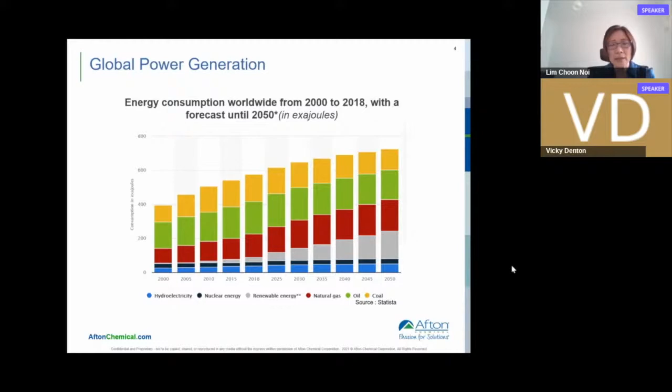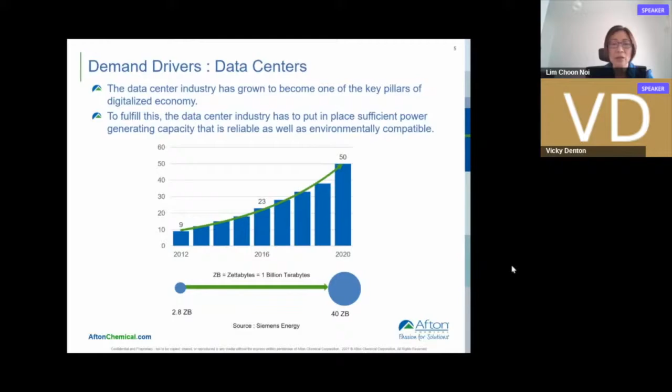So another area where we can see energy consumption increasing is the data platform, right? The current webinar that we are on, the data centers supporting all these webinar platforms are all needing the power to move ahead. So you can see that there's an exponential growth in the demand for data centers, and all this growth comes primarily from the use of internet platforms.

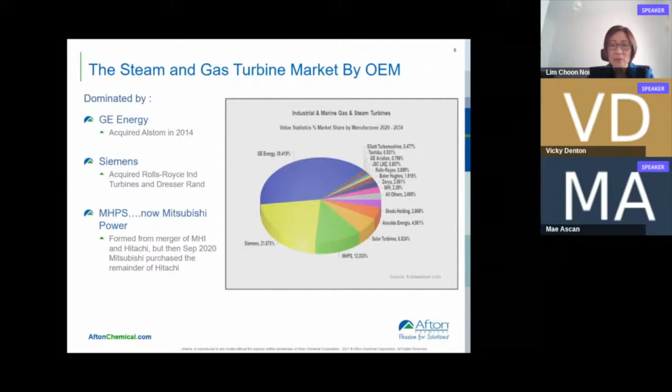So being the dominant supplier of such OEMs, it's obvious that they are taking a very strong leading role in making their turbines more efficient, more sustainable, more durable, as well as more long-lasting. And in doing so, they need to be supported by, of course, software, and all the other peripherals, including the oil that lubricates the equipment. And this is where turbine oil comes in as a very strong factor to support this sustainable growth.

Okay, how many types of turbines are there? Primarily, they are divided into 3 for the discussion this afternoon: water, steam, and gas. And you can see that there is a big difference in each of these, and the gas on the right column is actually having the highest speed. And the speed is important in this case, where it generates the power. Okay, so speed comes along with temperature in the oil, and of course the hot spot peaks.

So contrastingly, you can see that on the gas turbine, all the parameters that are listed are on the upper end as compared to the other 2 turbines. And so the severity of operation in a gas turbine is definitely a lot more in terms of demand, and therefore the demand of the lubrication process is also higher. That also explains why in the gas turbine, the service life is usually shorter compared to the other two turbines.

And that is a very strong factor when we have a combined system, meaning a steam and a gas system operating together. And obviously, with gas having a higher demand in operating conditions, this will also drive the combined system into a higher requirement.

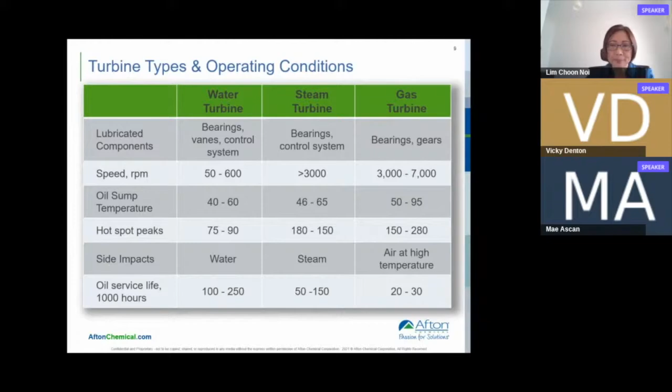Okay, so what are the requirements in the turbine oil, and how are they differentiated? Let me share with you here the OEMs that are playing a major role in providing turbine oil specifications. Turbine oil specifications defined by these OEMs are used for their own turbine. The turbine that they are making could be a steam, could be a gas, and they have this turbine oil specification that spells out what is required in each of these turbines.

On the right hand side, you have these industrial specifications, which are non-OEM defined, but are industrial standards from ASTM, the British standards, the German standards DIN, ISO, Japanese standard JIS, China GB standards, and US military. So these standards will define the type of oil that is required to operate in a certain type of turbine. There are other OEMs that do not define turbine oil, but they do also use these specifications, especially the industrial specifications, to guide the use of the turbine oil.

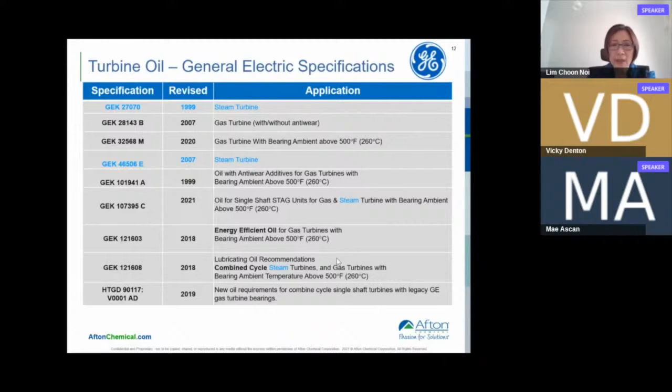Okay, so we'll go into a bit more detail on the turbine oil. In particular, you can see that the lubrication does not only include the turbine, it includes accessories linked to it, like the bearing and the gear. And therefore there are turbine oils that require EP, extreme pressure additives, since those need to be lubricated as well.

In the turbine oil specifications for OEMs, other OEMs like Siemens, MAN, Solar, Mitsubishi, and Ansaldo also have their own specifications as defined, and they are shown in the listing here. And one area is that they are sometimes divided into gas and steam, with different operating conditions.

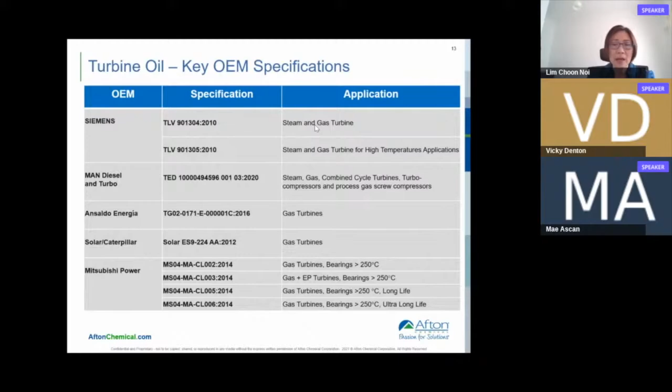For example, in the case of Siemens, they have two specifications: one covers the higher temperature and one covers the normal temperature. So in this case, a turbine oil that meets the higher temperature would naturally meet the requirement for the normal temperature, but not the other way. So it is important that when you select the turbine oil, it is suitable for the type of equipment as well as the condition of the equipment.

Okay, so on the next page, you can see that these turbine oil specifications are covered by industrial organizations. They are non-specific to any OEM, but some OEMs have adopted them as the basis and then added other requirements. Again, each of these specifications covers different conditions, whether it's normal standard temperature or higher temperature. For example, the DIN covers two temperatures, the standard and the high temperature application. And in the ISO, there's even a range that covers combined cycle turbines.

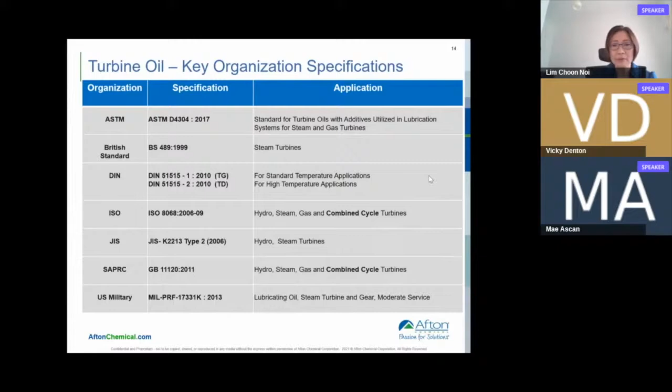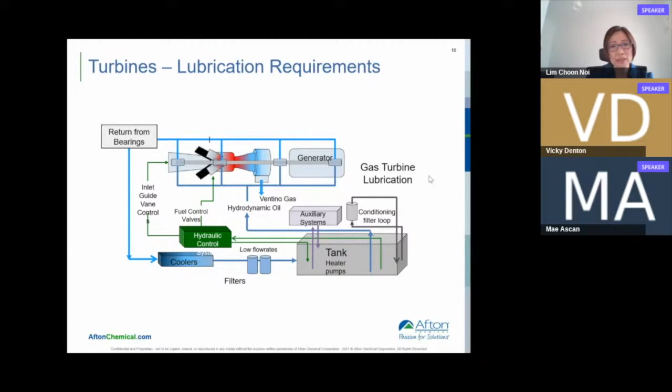So it's not just the OEMs that define the specifications for a turbine oil, it's also the industrial organizations. So what goes into a turbine oil to meet these requirements spelled out by either the OEM or the industrial specifications? You have seen from the requirements that turbine oil lubrication is about the equipment. It's about the whole system, not just the turbine alone.

Now, another characteristic of this turbine oil requirement would be what we call the surface characteristics, things like good air release property, good defoam property, as well as metal protection. Good air release is actually a property of the base oil, so it is important to choose a good, very stable base oil to work with. And when we talk about lubrication, foam and air do not lubricate well. So we need to select a fluid that has good demulsibility and good foam control.

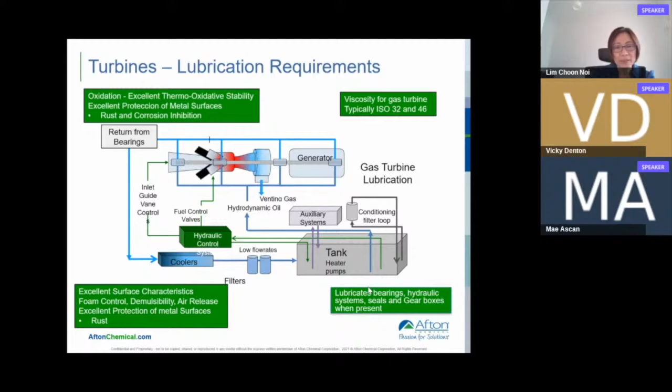So to sum up, the lubrication of the turbine oil also covers bearings, it looks at the gearbox, it looks at seal protection. So in looking at the turbine oil lubrication, we need to consider where these properties are embedded in the turbine oil.

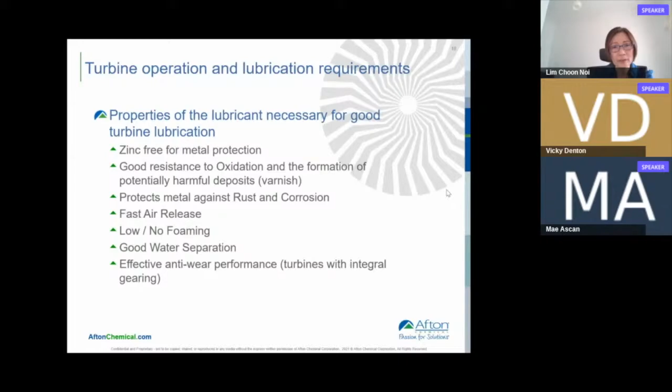Okay, so this is a summary of what I have just mentioned about turbine oil requirements: good oxidation, strong metal protection, whether it's steel, copper or bronze material, good air release and defoam properties, and a good selection of base oil that is compatible with the additives in the system.

Now, when we talk about turbine oil, the impact of the base oil cannot be ignored. We have base oils in Group 1, Group 2, Group 3, Group 4, and when we talk about mineral-based turbine oil, we typically look at Group 2 or Group 3 as suitable for a mineral-based turbine oil.

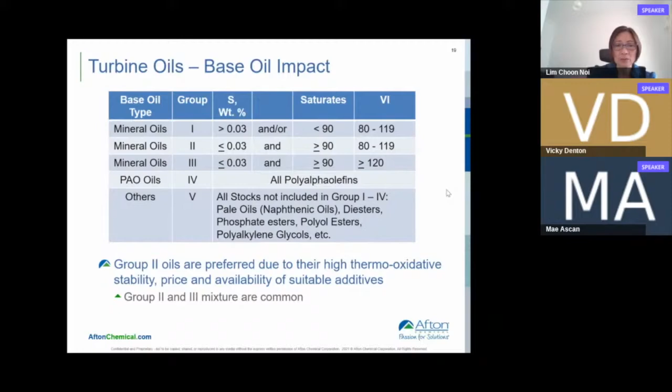Group 2 and Group 3 are the prevalent source and the preferred source of formulation with turbine oil, due to their nature of being very thermally stable and having good compatibility with additives formulation. So in the arena of turbine oil, preference is Group 2 or Group 3. And currently in market, Group 2 has very high accessibility, reachability, availability, pricing, economics. So it tends to be a prevalent source.

So this is an overview of why we choose Group 2 and Group 3. In a Group 2, we find that it's better in response to antioxidants, good synergies with antioxidants, and also good oxidation life measured by TOST. This is an oxidation test, and it also has a good air release requirement. So the preference of the base oil is also due to the base oil properties.

Another area, as an additive supplier, we find that the importance of selecting the correct or appropriate base oil is also to cover a very important area in oxidation specific to turbine oil, which is the varnish or deposit formation. This is a measurement of oxidation, the oxidized product, but quite specific to turbine oil.

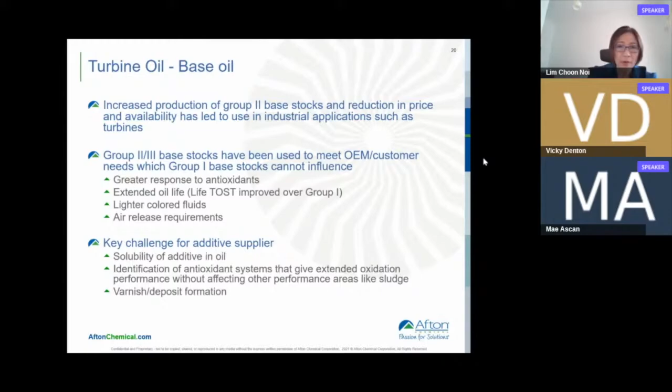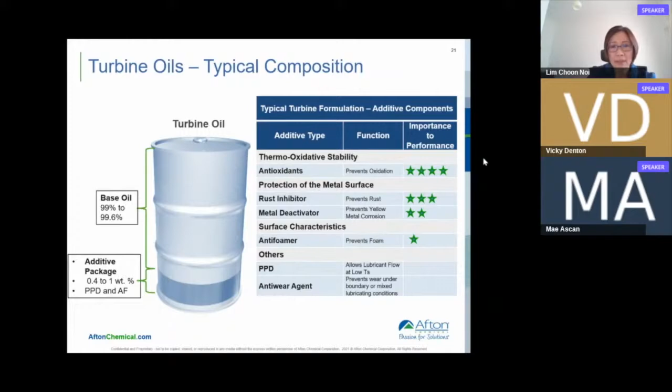It's a pictorial representation of what goes into a turbine oil. You can see from the number of stars here, the antioxidant and the rust inhibitor are the key components inside the turbine oil. So naturally, as major components, they would be the most carefully considered and selected chemistry as well as functional properties to match the type of turbine oil. Others like anti-foam could be complementary to the function if it is required.

So just go into a little bit more on the technology of the turbine oil. What is included? We know that antioxidant plays a very important part. When we talk about antioxidant, we talk about free radicals. It's just like in the human process, we talk about aging. In the case of a turbine oil, we also talk about aging of the oil, oxidation of the oil. But there are byproducts being formed, typically listed as varnish or sludge, and the varnish or sludge will form a coating on the metal surface and interfere.

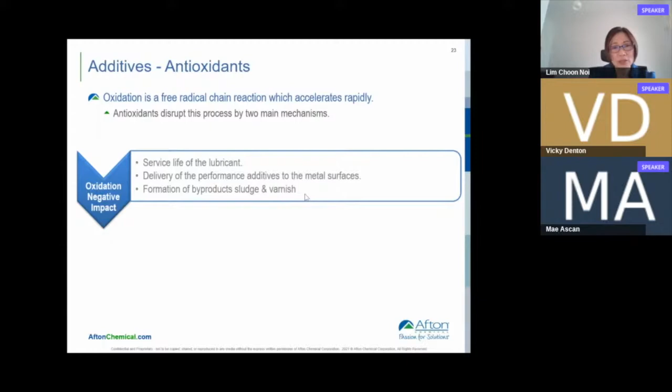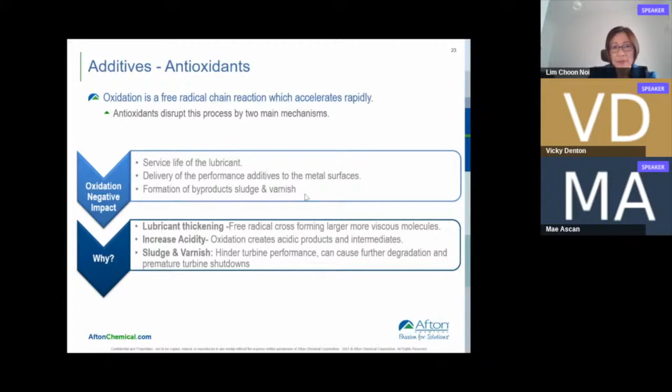So this has a negative effect because it's a chain reaction. Once you have an oxidation starting, it will cause more oxidation to start. This increases not only the acid content, it will also cause a lot more issues like cross-linking, like chemistry of the oxidized material affecting the current fluid. So these factors cause the turbine oil to have a shorter lifespan, and the longer this sludge or varnish is in the system, the worse the turbine oil is. So it's desirable to have oxidized material as late as possible, therefore having a longer life for the fluid.

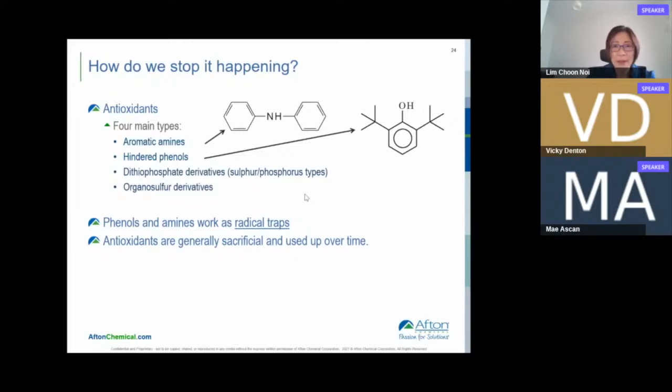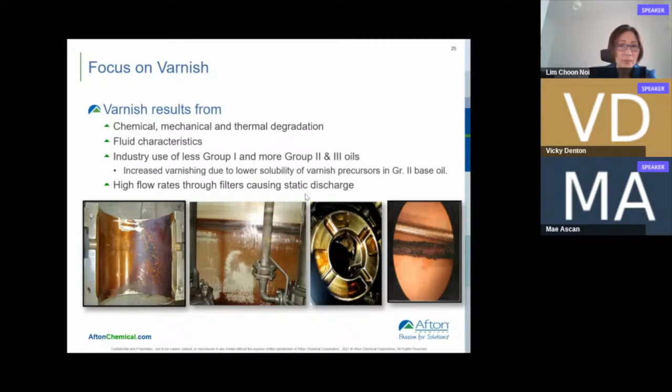Another test that is commonly used, which is a shorter test, is RPVOT, which is measured in minutes. Obviously, this is much shorter, but you can see that in the case of the RPVOT, it's also reflecting the higher requirement. The higher RPVOT reflects the higher requirement in the oil.

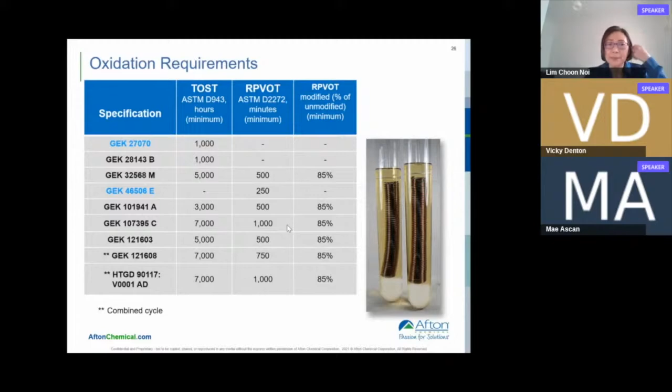So to formulate a turbine oil that meets this oxidation requirement, just in the laboratory, just in the design stage, is a very extensive process. And that's why a lot of effort and focus is spent on selecting a suitable and good antioxidant. So when we do the selection of antioxidant, one of the things that we want is for the antioxidant to last a very, very long time.

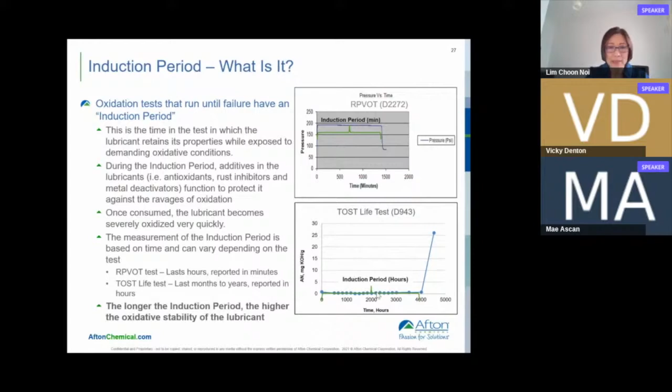And to last a very long time in this test, the interpretation is that the induction period, if you look at the graph in the bottom right corner here, is very long. The longer the induction period, the more stable the product is. So obviously, if a turbine oil has a shorter induction period when you test it, the oil is less stable compared to one with a longer induction period. The same applies for both methods, the TOST method as well as the RPVOT method.

The other additive that is pretty important, because of metal protection, would be the corrosion inhibitors. And when we talk about corrosion inhibitors, we talk about two types of surface phenomena. One is rust, for iron. Another one is for copper or copper alloy materials. So what it does is that the anti-corrosion additives form a protective layer on the metal surface, and by doing that protect the metal.

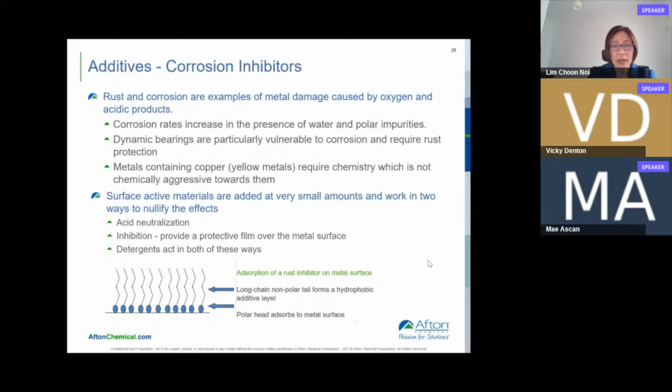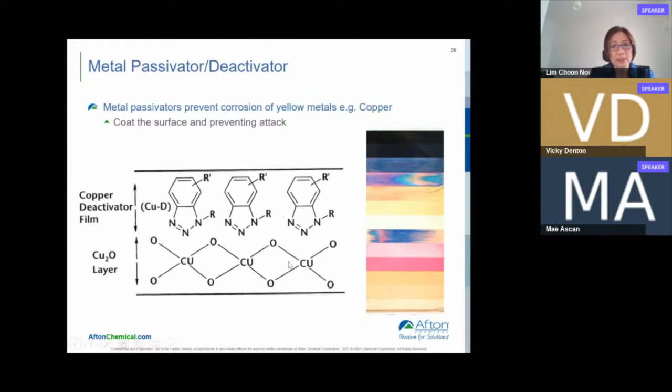And in this process, the metal is in a way protected because of the chemistry of these corrosion inhibitors that are covering the metal surface. So a good selection of this anti-corrosion, anti-rust, copper deactivator material is very important. This is a very specific example of protecting a copper surface or any copper or copper alloy material, and so it's actually forming a protective layer on the surface.

The importance of this is that where turbines are used, especially in a steam turbine where moisture or water vapor is present, or even a hydro turbine, corrosion has a tendency to set in if there isn't a good turbine oil to protect the metal surface.

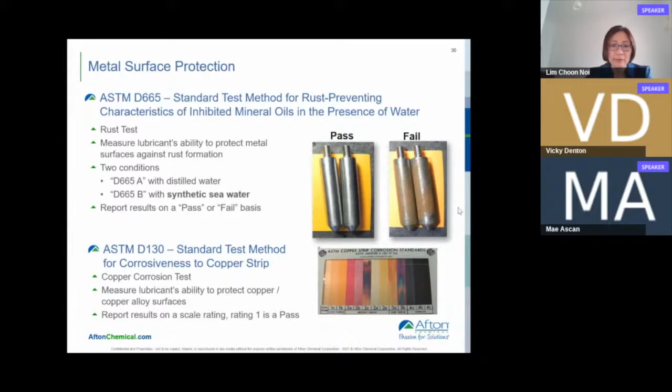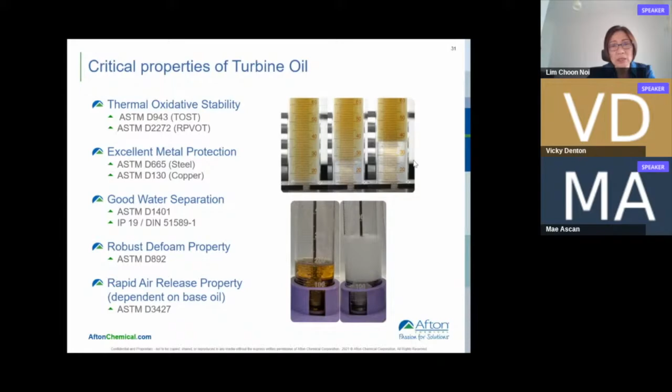So with these key properties of a turbine oil, we can see that in formulation of a turbine oil, in choosing the turbine oil specifications, in guiding the design of turbine oil specifications, the selection of the components as well as the formulation of the package in a turbine oil, all the factors have to come into play, and all of them have to be synergized to give you a good matching turbine oil for the respective function. Right?

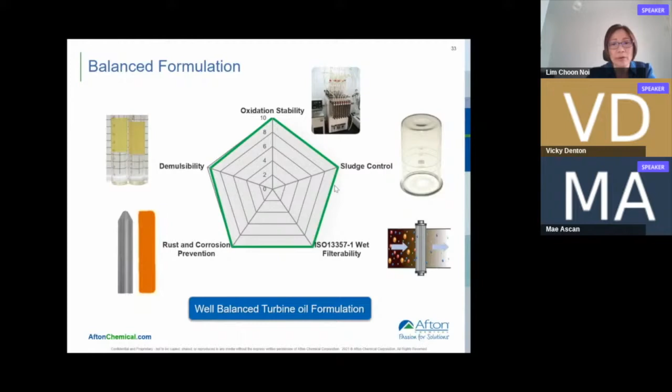So in the case of formulating a good turbine oil, we do say that the factors represented here have to be maximized. The number in digits represents the property. The higher the property, the better. All right. So especially in the case of the oxidation, it definitely has to be a very strong oxidation stable product to be in a turbine arena.

When oxidation sets in, oil degradation, free radical formation, chain reactions happen. So this will accelerate the oxidation process almost immediately, if not instantaneously, catalyzing more reactions to happen.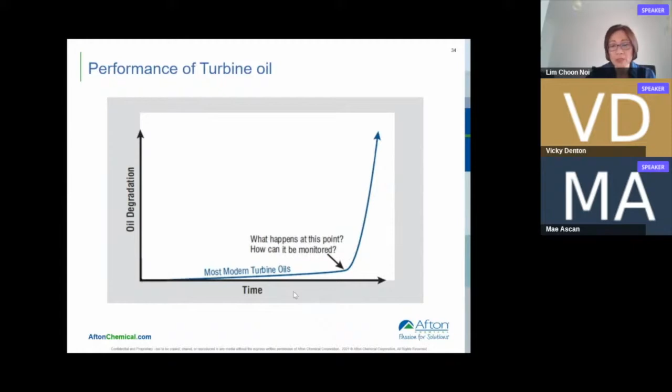So modern turbine oils, as we call them, we look at meeting combined cycle turbine oil, and in combined cycle turbine oil it is even more important that both the steam and the gas turbine are well lubricated to give the good combination of this combined cycle lubrication. Right?

And when we start looking at the properties of this turbine oil, we also realize why we need good turbine oil or effective lubrication, because this is talking about service life overall in a turbine. And in a service life, the longer the service life, the more value it can bring to the user, to the operator. And the longer the service life, the less downtime.

Okay, so the performance of this turbine oil also has to be managed during the life of the turbine oil, meaning that normally there's a program to follow up with turbine oil monitoring during the lifetime of the turbine oil. So having a good turbine oil to start with is not just the end of the story. You do need to combine it with a good program for the service life.

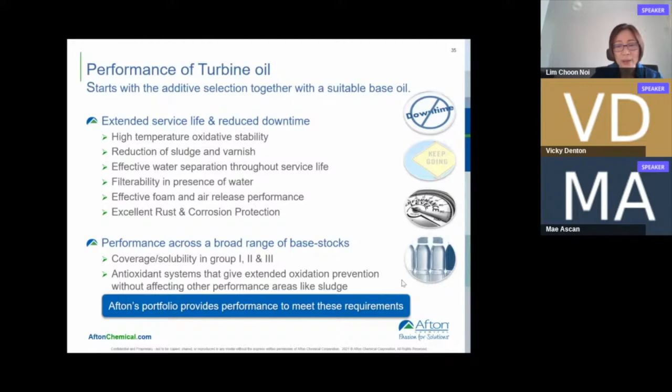Okay, so in selection of a turbine oil, when we look at this turbine oil as a performance fluid, right? Selection of base oil, availability of the base oil, and availability of this fluid to provide the above effective service life is very important. So this is where additive suppliers like ourselves will be looking at this to maximize the economics of a turbine oil.

Okay, so the growth of steam and gas turbines in summary is actually forecasted at 2%. All right, and this is because of the need for power and the demand for power. And all this demand for power means that in the future, the newer turbines will be designed with combined cycle more than just a single cycle, and increasing use of more efficient turbines requires better turbine oil to support the system.

Okay, so for turbine oil, when we look at operators, the operators focus on using the equipment for the most efficient life of the system. And OEMs are focused on designing equipment that provides efficiencies. The current efficiency of the combined cycle is in the magnitude of 60%.

And this is definitely going to improve as the technology of equipment improves. So likewise, the importance of selecting the correct or the good turbine oil is complementary to all these processes to provide very strong support for this industry. And that is the last page of my presentation.

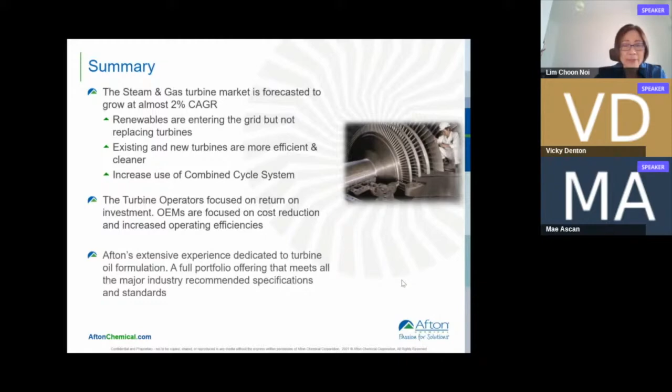So we have a question here from Pertamina, from Nuruddin. So the question is, several brands of turbine oils are facing foaming issues, about 400 mL of foaming tendency. But then after hiring a third-party filtration company, I'm not so sure about the second bit, but the question is, do we have any limitation from additive companies for the minimum filter micron rating to be used?

I think the question, if I may rephrase, is that there is a foaming issue. Yes. And they are using filters, right? And whether there is a certain filter size recommended from additive suppliers. Yes, to lessen the foaming tendency.

I think I would approach it from the angle of understanding what is the cause of the foaming rather than the filtration or filterability of the fluid. Because obviously you are looking at a used fluid. Am I correct to say that this is a used fluid? It's not clear, Choon Noi, but let's just assume it's a used fluid.

I think in the current technology it is the use of a well-designed type of antioxidant. Because the technology of the base oil currently is driven by base oil suppliers, obviously, and the additives are driven by the additive suppliers. So in this case, when we talk about improving the durability, the long-lasting use of this turbine oil, it is actually based on how well these additives work in the system as a whole.